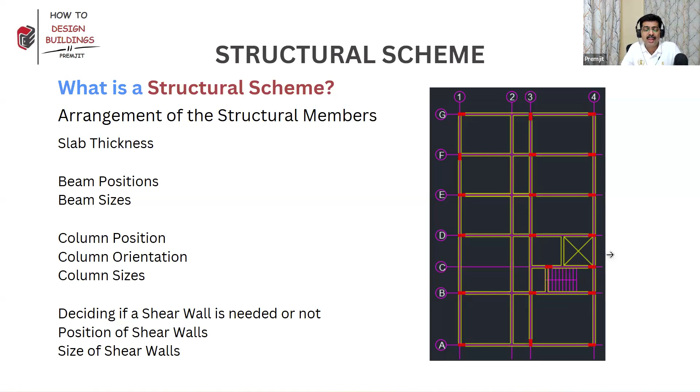Okay, now some of it for smaller buildings comes with experience. You can do trial and error and arrive at that. Some of it needs more detailed study. I'm going to give you certain rules that are going to help you to speed up some of these steps. We cannot completely develop entire skills, but I'm going to give you skill sets or tips that are going to let you explore this on your own, ask questions, and then further take it forward.

Okay, so before getting into scheme, let me also tell you something about IS 1893:2016, which talks about regular and irregular configurations. The below points will reduce damage during earthquakes. The primary aim of a good building scheme is not just gravity loads, it's also about lateral resistance. So buildings with simple and regular geometry are going to perform better. It's not that you cannot have complicated geometry. It's not that you have to deny a client what he wants. But regular, rectangularish geometry will perform better.

Uniformly distributed mass in plan and height. That is, you should distribute your services, your stair, your heavily loaded things equally in the floor. Not like one place you have a lot of concentrated loads, and in another place the loads are very less. Don't do that. In the group, somebody had put a doubt today saying that he's getting tension in one of the columns.

Is it because there is not much load on one side? Yeah, try to distribute it. It's an architectural and client's responsibility, but then you are the person who needs to advise them. Yes, you need to know that. Uniformly distributed stiffness and height, avoid irregularity, and avoid cantilevers.

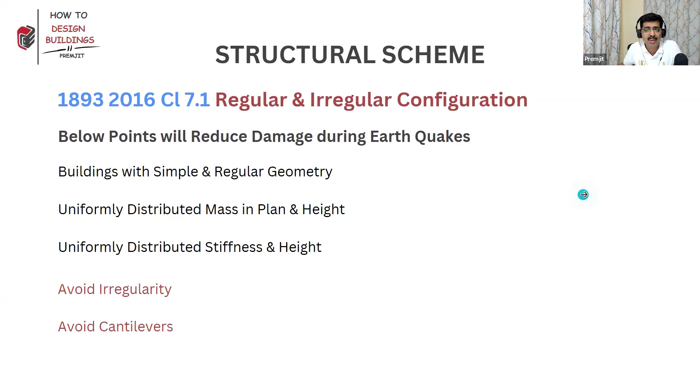So avoid cantilevers unnecessarily. If there is a real requirement, yes, we may have to give it, but otherwise you need to advise and remove them. Okay, so this is one single sheet which will explain it to you. It's a cheat sheet. If you want, you can later ask in the group. I can share this with you. I might have done that in the past.

Point one, avoid irregularity. So what do you mean by that? Geometric irregularity. It should be rectangular, symmetric. All this will help you in having a great performance. I will show you certain things which will allow you to understand this more. Uniform mass, as I told you, it should be distributed. Here some library, here some lightweight things. If you distribute it in that way, you can end up in irregularity.

Uniform stiffness. Say if you put large columns here and small columns in another place, a shear wall in a corner, all this can result in non-uniform stiffness distribution that can create problems. Then your building should have some initial strength, adequate member sizes, some initial stiffness and ductility. Now, who can tell me what is ductility?

Many engineers get confused at that point, especially if you are an MTech holder and somebody asks you in an interview, or if you are a BTech holder aspiring to be a structural consultant and straight away somebody asks you, are elasticity and ductility the same? What's your answer? Yes or no? Tell me. Yes or no? Then differentiate that. What is the difference?

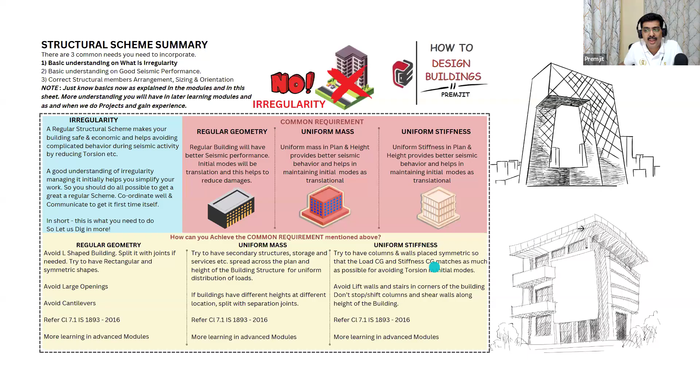Then if you have non-uniform mass in your building, you need to avoid that. So spread the loads across. If you have secondary structures, storage and all that, spread that across. Stiffness, again, as I told you, lifts should not be in a corner. I've already told you that. So these are things that you need to have in order to achieve good performance of a building.

Now, how do you size slabs? If you have done my free course, I have mentioned in that course how to size a slab. That's what I remember. If not, you can ask me. I can share certain things. How to size slabs, beams and columns. You can size it by trial and error if you know how to analyze and use ETABS.

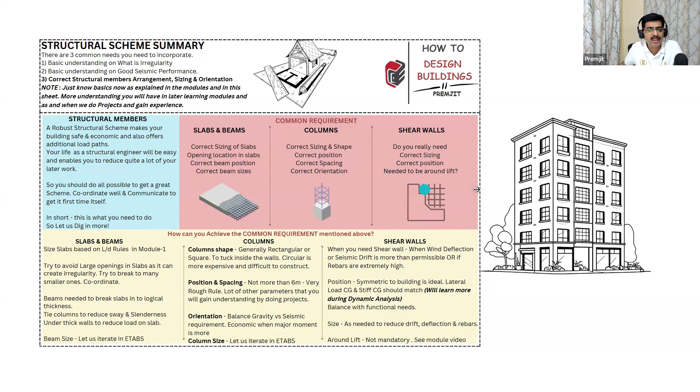That's the better method. Yeah, so you need to know how to size slabs and beams, columns, shear walls. Yeah, this is slightly advanced. Maybe if you're a beginner, it will be a little challenging for you. Other things you can learn faster.

And what is the role of a structural slab in a building? Many of us think that slab is a secondary member, but then it also has a diaphragm action. It's tying the entire building together. Yeah. So it allows the lateral load path in a building. So that's why if you have heard people saying, yeah, avoid large openings in slabs.

What is the problem with large openings in a slab? That will create irregularity. It will create a lot of problems. There will be discontinuity in the load path. Yeah, so if this is your floor plan, your vertical members are tied together by the slab. Yeah, so it acts as a diaphragm.

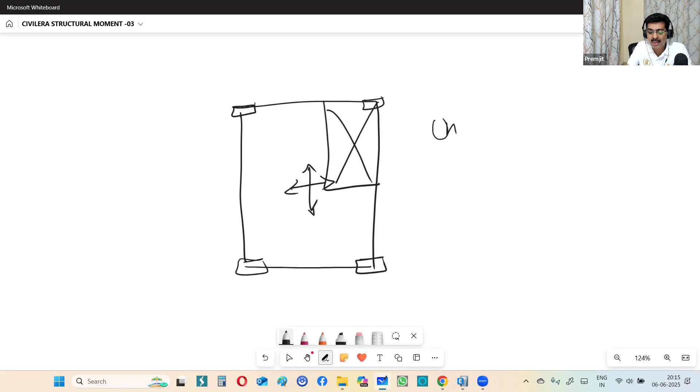It's like a rigid member in the horizontal plane. So it's tying the entire building together. It has a great role in ensuring the building is performing better. Now, if you have a large cutout like this in the corner of a building, that is undesirable. Yeah, that's going to create a lot of problems in your building, irregularity in your building. Okay, so you need to be mindful about that.

So slabs are not just some element, it's having its own significance. So you need to know how to size that. Architects decide the functional space and slab locations, but then we need to educate them to avoid large openings, especially at the edges. So if you are a structural engineer, if you are early in the project, in the design development stage rather, you should be able to propose cutout locations and all that, which are fairly okay.

Okay. And when it comes to role of a beam, or how do you decide beam positions? Basically, there are three rules I can give you for deciding beam locations. Who can tell me how do you decide beam locations? There are three basic purposes for beams. Yeah, one is to split a slab into manageable thickness. Okay, say if you have a very large slab, 4 meter or 5 meter by 7 meter, what is the problem? The slab thickness will be very large.

Okay, so if your slab is very large, its thickness is also going to be large, right? So if the thickness is also large, what happens? The weight of the building will increase. If the weight of the building increases, the seismic forces also will increase. So everything is bad if your slab thickness is very much higher. So first rule, to divide the slab into manageable thickness. Yeah, 120, 100, 150, that kind of thickness we need for the slabs. So in order to achieve that, we give beams. That's one role of your beam.

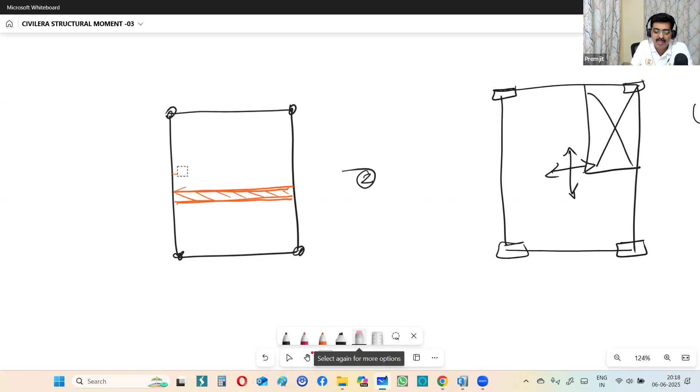But say the wall is slightly away here, then maybe I would like to have my beam under that so that the wall is directly on that beam rather than, I don't want to give the beam over here. Yeah. So slightly I'm moving that beam. So that decision you are taking because of the presence of the wall. So one slab may be slightly larger, the other one may be slightly smaller. Yeah. So that's the second rule.

And the third rule is to tie the columns. Yeah. You need to tie the columns in order to ensure that there is a load path as well as the columns are not very much slender. Of course, the slabs also perform the tie action, but then I would prefer to have a beam tying the columns.

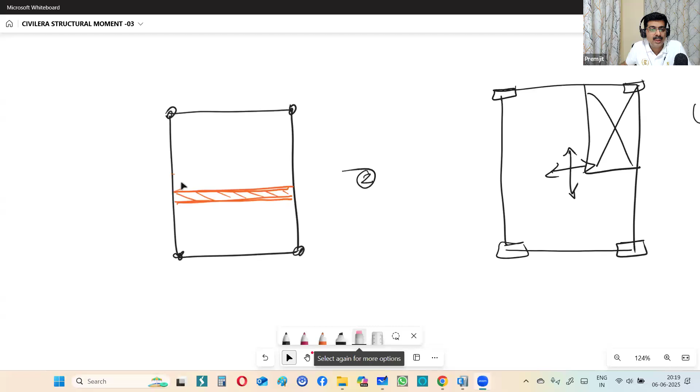So three rules for deciding the location of beams: to divide the slabs into manageable thickness. Second is to support the walls in the building. And third is to tie the columns. So wherever there are columns, you tie them with beams. Yeah, so these are the three primary roles of a beam. So you manage these three.

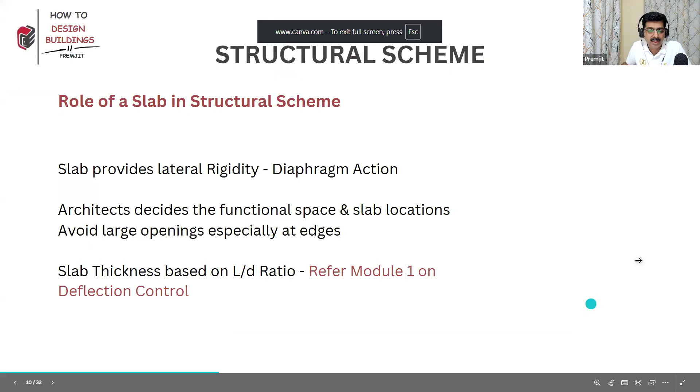See, in a real building, you will have all the three together. So you need to be able to manage that, decide that based on these three requirements. Yeah, so these are tips, but you need to apply it by doing real projects. Okay, so

Column location: there are many parameters, architectural things, structural things. Yeah. A very rough rule: if it's a smaller building, ensure that your beam spans are not very large. So at every 6 meters, if it's an apartment or a small space. If it's more than 6 meters, you may end up with larger beam and column sizes. So ensure, again, it's a rough rule, okay? It's not a mandatory every time rule.

It's a rough rule. Your soil type also decides spacing. If your soil is very poor, you cannot afford to have very large concentrated loads. So maybe if you have a building near a coastal area where N values are very poor, then you may have to have 3 meter spacing for your columns, 2.5 meters sometimes. I mean, it's not all the time, depending upon the kind of the building. Yeah, so soil type also decides your column positions, not just your functional plan.

Your building shape requires careful attention. Yeah, one example. Say if you have a building, you can see my screen, right? Say if you have a building of this shape, something like this or symmetric to it. You may need a column here, a column here, a column here, a column here. Say this is 3 meter, this is 1 meter. You may need a column here.

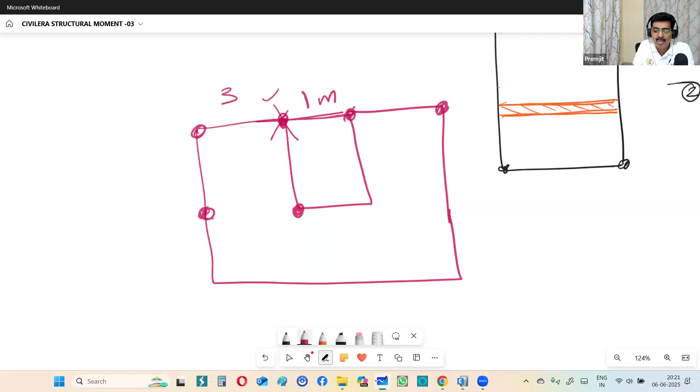Now, if the architect can allow you a beam here, maybe this column you can avoid, or maybe you can keep this and avoid this. It depends. Maybe he can convert this into a pergola. It's an open space. So all this you need to discuss. You have to have some idea about architectural and other requirements so that you can propose this. As a structural engineer, you also need to understand architecture in order to propose certain things. Same way, architects also should have some understanding so that they can decide a few things on structures as well. So that's how it needs to be developed.

And with the coming of AI, you have a clear edge over architects in leading a project, provided you are good at multidisciplinary understanding and leveraging AI. Yeah, so focus on that.

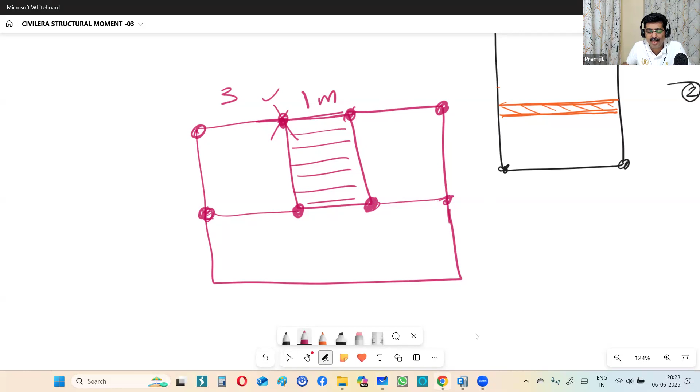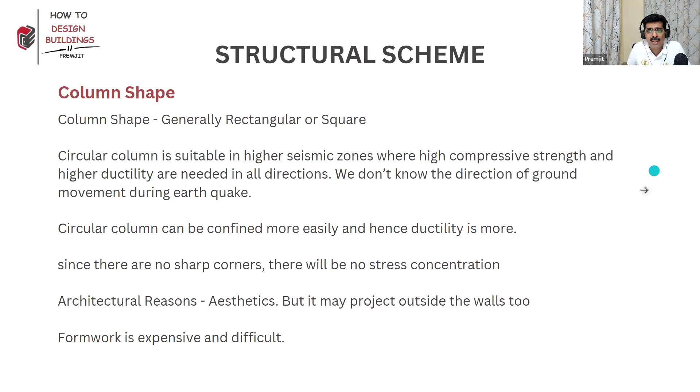But we will respond. Okay, so column location, I gave you certain ideas. Column shape, generally rectangular or square, but there can be situations where you need L columns, sometimes even other shaped columns. I can share these slides for your understanding if you want. You can ask me that also. Column orientation. Let me just quickly have a word on column orientation and then discuss more things. I'm skipping some less significant things that you can understand from the cheat sheets that I'm going to share with you.

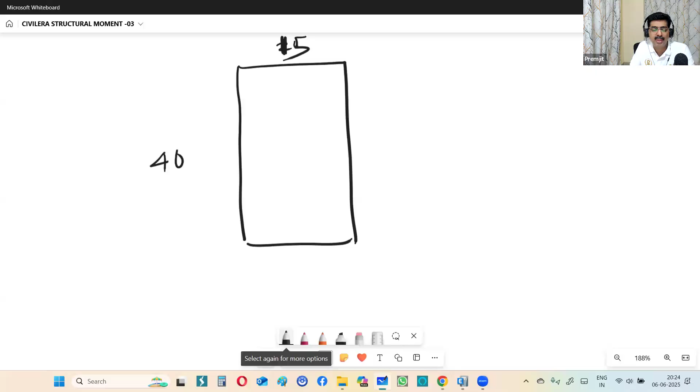Okay, so the column orientation. Assume that you have a building like this. Say this is 40 meters and this is 20 meters, or say 15 meters. Let the number of floors be 5 or 10, whatever it is.

Or let's make this, okay, this is 15 meters. Now, let us do one thing, let's make this like one room for easy explanation. So let this be 7 meters and let this be 3 meters or 4 meters. Now there are two aspects. One is gravity loads. Second is seismic, the lateral loads.

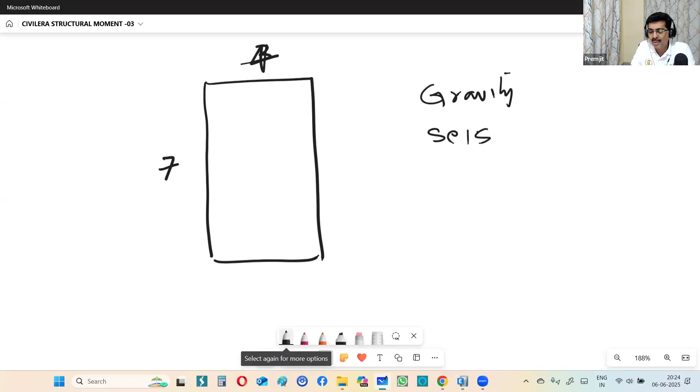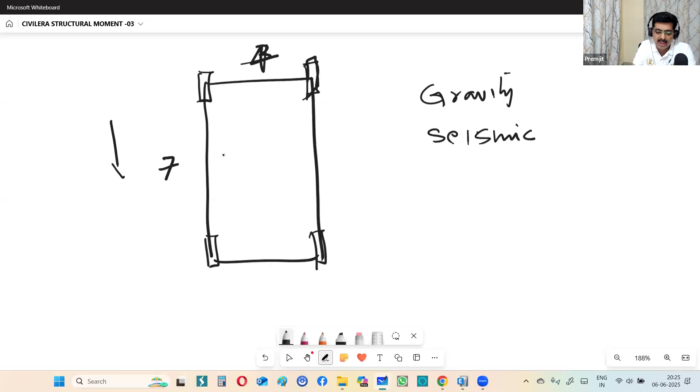Now, if you look at it from the gravity load point of view, this would be the orientation preferred. Okay. What is the reason? Because in this direction, you have larger frames. So now if your columns are oriented like this, it will have better capacity. Why? See, how is the column going to have the bending? It's from the beam. So the beam is having this bending, under gravity I'm talking about.

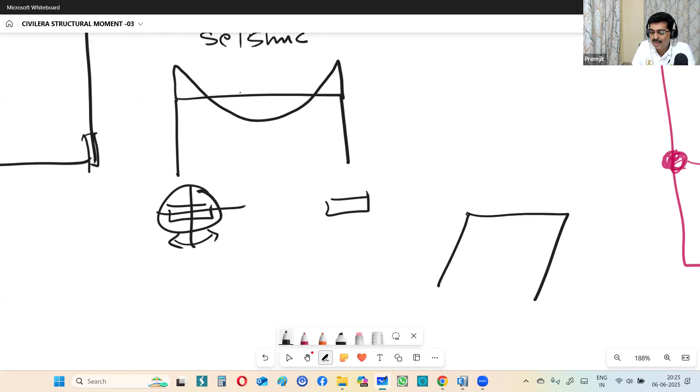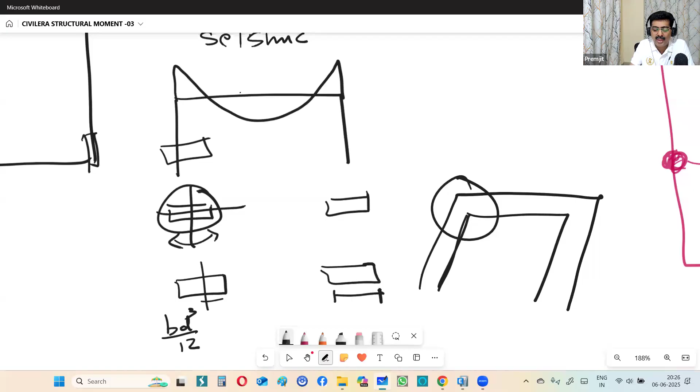When this is having a bending, it's the column which is resisting that. It's a frame, right? It's all framed together. It's not simply supported. They are connected together. They are monolithic and behave together. So there is a frame action. Okay, so the more the inertia for this, the better. What is inertia? BD cube by 12. So more in that direction of bending is better. So here the spans are more, so it's oriented like this.

But then please know that when the building is narrow, from a seismic point of view, this will have more criticality in this direction probably. Why? Think about a table you are pushing and trying to overturn. When the width is less in that direction, it will fall faster. In the longer direction, it will not fall because it has more stability in that direction. So from a seismic point of view, maybe you will need it in this manner. So how do you go about that?

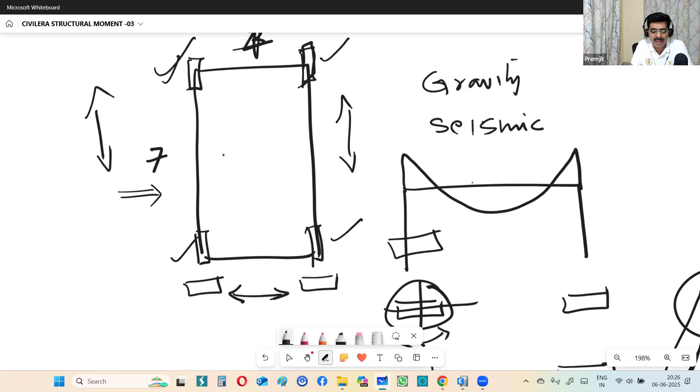So if you're confused, what you could do is for your initial position and orientation, go with your gravity rules. Later on, do your analysis, understand the deflections, lateral deflections, and decide based on your analysis results. You can decide if you want to reorient it. Certain things, with experience, you will be able to judge very fast and easily. But certain things you will have to do your analysis and then arrive at your final orientation.

When you have multiple frames and multiple floors, it might be a little challenging for beginners, but this is a rough rule. Do more of it. Start doing it.

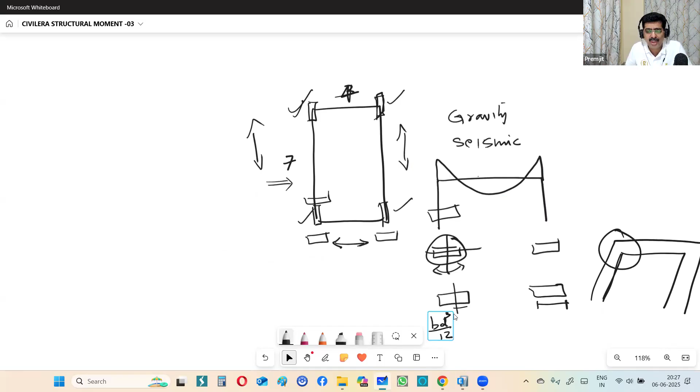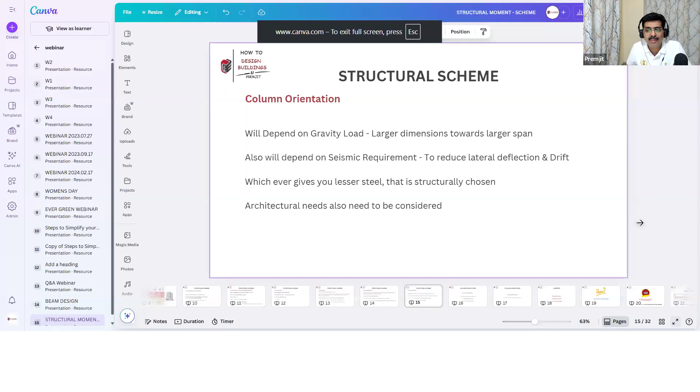So this is one little rule for deciding the column orientation. There are more things in that, but I'm giving you an idea of what you need to be doing based on gravity load and seismic load. You need to decide your column orientation. Now tell me, what are the benefits of doing this? Benefits of doing a proper, very good scheme.

You might have had challenges from clients and architects. I want to remove these columns. Fewer columns are better. How many of you have heard this? Fewer columns are better, it is more economic. How many of you have heard this? And how many of you believe this? Say yes if you have heard this from an architect or a client or somebody, that fewer columns are more economic.

Yeah, so there are a few yes. Akshada says yes. Parikshit says, but it's not safe. Yeah. So less is not great. More is also not great. The optimum, that's where you need to be able to get to. You should be that engineer who gives optimum design, not more, not less. That's where you have to be. There is an optimum for everything. Less is not great.

Because if you have fewer columns, maybe your footings are going to be larger in size. Maybe your building is going to have fewer alternate load paths. So there are going to be a lot of challenges if the numbers are less. It's not that it's going to be more economic. It's going to be a compromised building if it is economic.

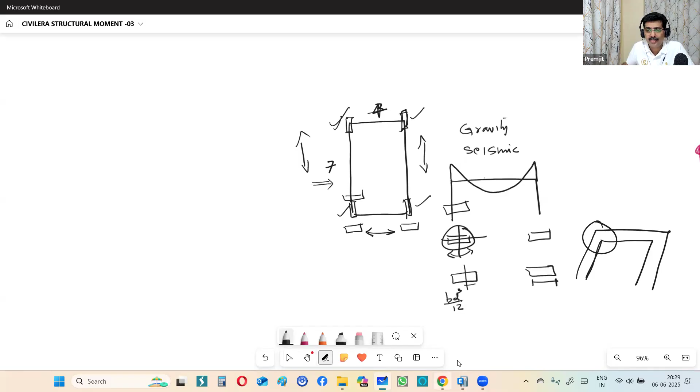Okay, so what are the advantages of having a great scheme? That's what we are going to very quickly explain. And if you are able to convey this to your clients in the right way, even architects, they are going to accept that. Many times it's the way that you convey: you are rigid and you are trying to demand things. You need to be able to influence them, those who are wanting that.

Okay, one is better performance. What do you mean by better performance? I will show you some better performance in some time. But we discussed about, what do you call, irregularity. Avoiding irregularity will allow better performance of your building in the event of earthquake. The second thing is alternate load path. I will come to that. And third is easy to manage design.

In the later life of your design, say you started your scheming and try to get the perfect scheme, then later on you will not struggle. You means the entire design team, you and the architects and everybody together. You will not have to struggle to make things work by doing, redoing, testing, looking at the stiffness distribution, changing that, playing around with the structure and changing the stiffness center and so on. So you will not have to do a lot of work in order to manage. You will save time, you will coordinate better, you will get a more performing building.

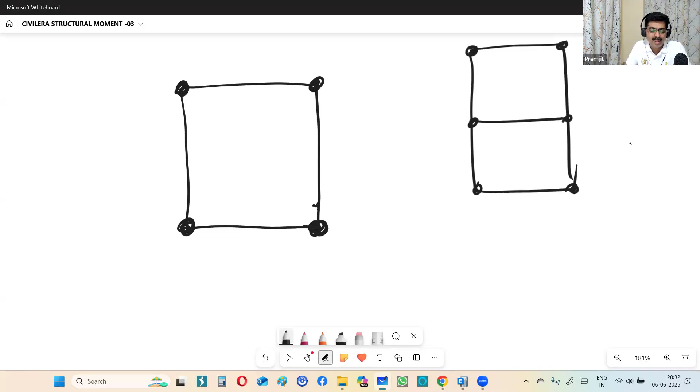Now assume you have a building or say a small room. This also increases your confidence if you do proper engineering. And it's very important for you to understand this so that you can influence others also. Say the architect and client said I want only 4 columns, it's a small room. Say this is 7 meters. Due to whatever reasons, if one column fails, let it be a blast, accident, design mistake, construction mistake, whatever, one column is gone.

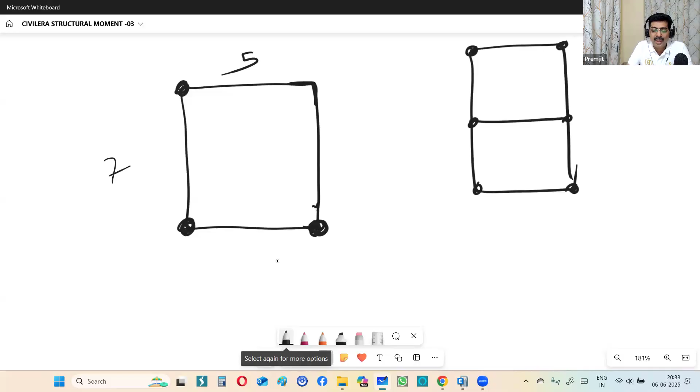Now, what is the possibility that the structure will not fall immediately? Very less possibility. Why? Say this is 5 meters. If this has to stand, this one column needs to stand like a cantilever, taking this point load also. How many meters? 5 meters. Very rare chance. But had you got one column here breaking the 7 meters, even if one of the columns goes, you need to cantilever only 3 meters, 3.5 meters. And it's also having a back anchorage. That is likely to stand.

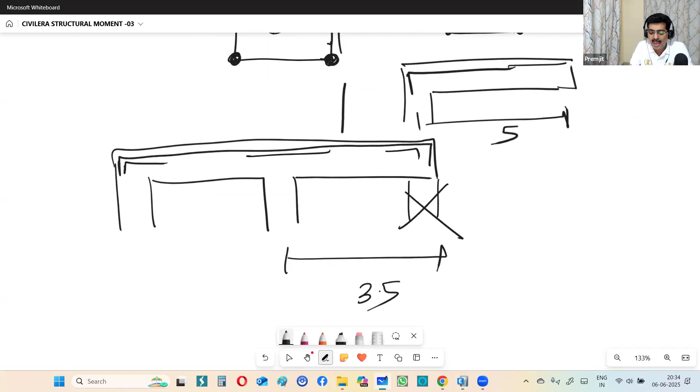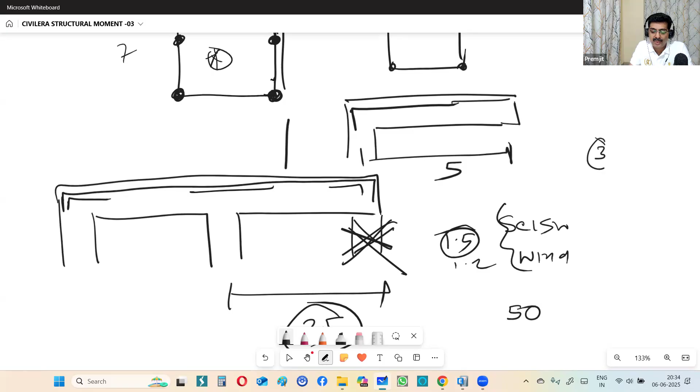Why? Because you would have designed this for seismic and everything. So your detailing would have been something like this. You have extra bars here, you have extra bars here. This column went off, now it's cantilevering 3.5 meters. 3.5 looks very large. But the fact is, you have done this for seismic, you have done this for wind, and moreover you will have 1.5 or 1.2, whatever your factor of safety. Even under gravity, you have a 1.5 factor of safety, which means it can take 50% more load. And your design live loads are generally very high; you will not have that kind of live load. So when this column fails, you only have the actual unfactored gravity load.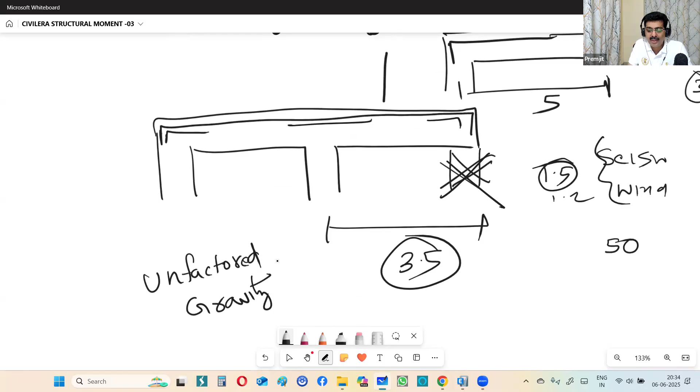There is no seismic. Say an accident happened. So at that point, there is no seismic, right? It's just an accident. Column failed, maybe a blast, or maybe a construction mistake. It is cracking. Okay. Now you have already designed for seismic, but seismic is not acting, so you can use that rebar available there. And your factor of safety is not needed now because you are not having that overload.

Dead load also is not overloaded. It's the right amount of load here. Maybe live load will be less because people are going to be evacuated. So this steel provided here will bridge that failure. It's having an alternate load path. The actual load path would have been load going half here, but right now this is gone. Now the load path changed to this cantilever.

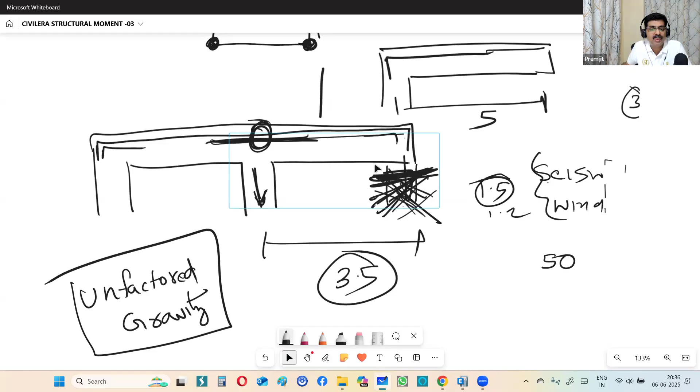More loads are going here, but all these are designed for factor of safety as well as seismic and other combinations. So it has that capacity to act as a cantilever. So if you have checked this prior to your execution and provided the scheme in a way that you bridge all this, then your building will never have disastrous collapses.

Now you should not ask me, what if this column and this column fail at the same time? That's a very rare chance, right? The probability is very less. If that happens, your building might fall down. We cannot take care of every column failing at the same time. We are not magicians. But one member failing at a time, you should be able to take care of that. Same way beams.

Assume this is a 7 meter by 5 meter slab. Now, if you don't give any secondary members, what happens? If something happens to any one of the beams, the chance of the slab remaining there may be lesser. But if you have one here, maybe this was designed as a two-way slab. If this beam fails, it can still span as a one-way slab, applying the same principles. Because live load is less and factor of safety is there, it might be able to span as a one-way slab, provided your detailing is proper.

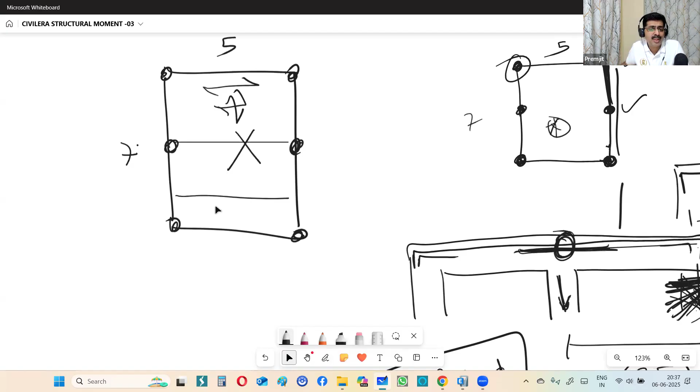So this is one of the many reasons that a non-engineered building is sometimes not failing, it's standing, because without the Maestri's knowledge, a lot of alternate load paths are automatically coming in. Without your knowledge, a lot of load paths already exist. So now think about you applying that mind and scheming. What will be the result? Your building will perform wonderfully. So apply your mind.

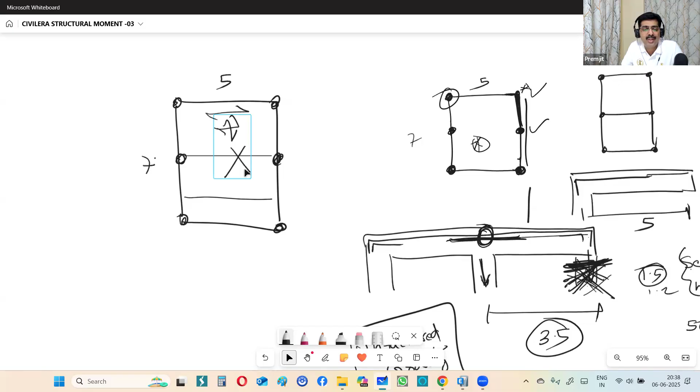Even if you are an experienced structural engineer, from tomorrow, start doing this. Say you produce your drawing. Your final layout is ready, and you are going to issue this to site. Spend half an hour. Identify some key members in your building, as in, if that member fails, can more than 25% of the building fail?

Just take a look. See if this beam fails, or start from columns. If this column fails, will more than 25% of the building fail? Then it's a disaster. Attend to that by providing additional columns. Same way, if one beam is removed, say this beam fails, can this slab now act as a one-way slab? Or can it act as a two-way slab like this just by the removal of one beam?

Might be possible because, say, this is 2 meter, 2 meter. Without this beam, that becomes 4 meter. This is 3 meter. Maybe you still have only 8 at 200 requirement. So removing this beam, that slab might still be standing for unfactored moment. So identify some key members, remove one at a time, and check for the possibility of that building standing. 75% should stand at least. Otherwise it is going to be a disproportionate collapse, or a large area will collapse.

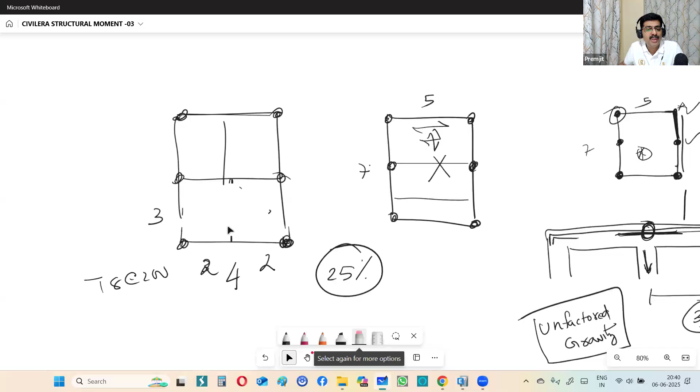And if you are able to convince your client saying that this is why I'm doing it, this is the reason for that. If you do it without much additional cost, minor additional costs, maybe you will be able to meet that. So here, the only change that you might have to do is, when you had this beam, maybe you had detailed your slab like one bar going here as cut bars.

Okay, now when that slab has to stand without this beam here, maybe you will have to give that bar continuous, like this. So that's a minor cost increase. Okay, so if you take care like this, your building will have a lot of bridgeability. You will not end up.

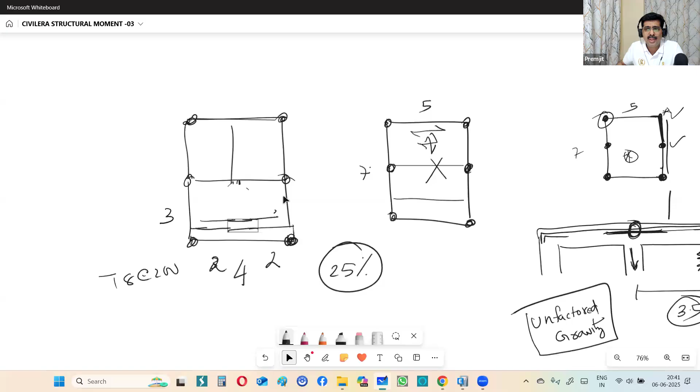So depending upon the importance of your building, you need to decide how many checks you need to do. If it's a small building where you don't expect any kind of accident, leave that. Okay, so that's one tip, or that advantage that you're going to get with a great scheme. All right. Now coming back to the presentation.

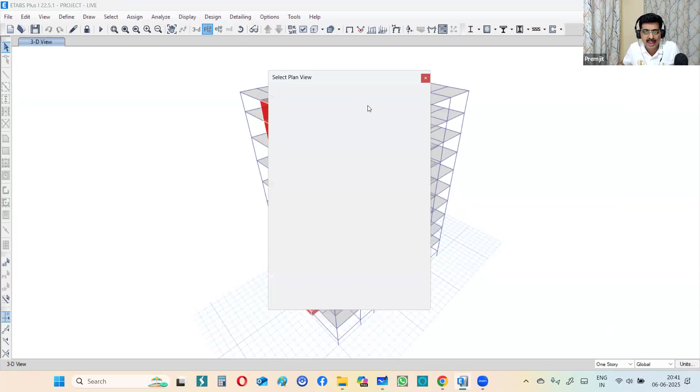Okay, so let me also show you one more thing, better performance. Again, I might have shown this in the previous webinar also, but let me show you for the newcomers here. Say this is one of the projects that I do for the current batch of DCTS students. Let me take the plan. Let me show you a few things. Give me a second.

This is the ETABS model of that, analytical model of that. This is the scheme. I'm not saying this is a perfect scheme. There are shortcomings in this. Can anybody tell me what is the shortcoming? What can be the shortcoming in this? Type and give me the answer based on whatever I told you so far. What can be a shortcoming in this particular scheme? Just don't say shear wall.

What shear wall? And I think Michael is also my student. Beam not connected to column. Beams are connected to column, Pavan. Lift at end. Vivekanand says lift at end. So what happens if the lift is at end? Location of shear wall. Parth is saying location of shear wall. Anyone else? Shear wall will cause irregularity. Opening.

Ravi, who said, oh, Somil is saying large opening. No, this is not a large opening. This is a normal opening. This is a stair. Shear wall should be at center. Yeah. You can compensate that. Even if you have a shear wall here, you can manage that with other additional walls, but then that becomes a little challenging for this kind of building.

Okay. So let me show you that. I have analyzed this. I've done a dynamic analysis for this. Already done. I'm not showing you how to do the dynamic analysis. Now I'm going to show you the mode shapes. So I'm going to animate this. Give me and apply. So it's going to show the mode shape here.

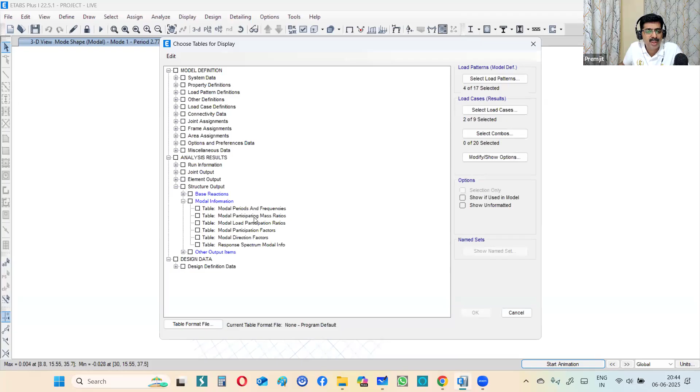But then you can make out from your model mass ratios. If you go to the table, what I showed you was the graphical representation. Now here, you will be able to find out the mass participation by seeing this. You can see here that y direction it has 52% and torsion is 28. So 52, predominantly it is y direction translation, but you also have torsion.

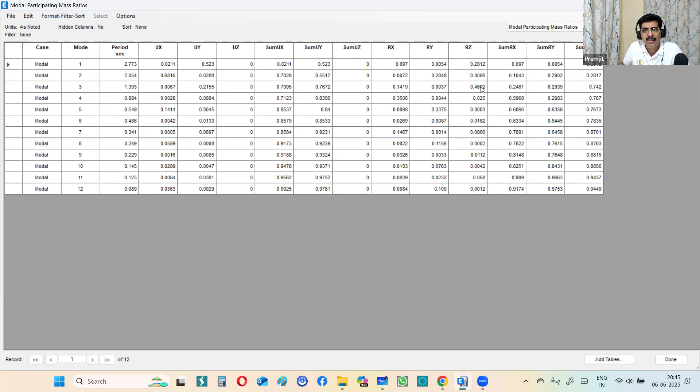Now, if you look at the third mode, you have 21 y and quite a lot of torsion. See, 46 is torsion. So let me show you that also graphically. Let me go to the second mode first and then animate.

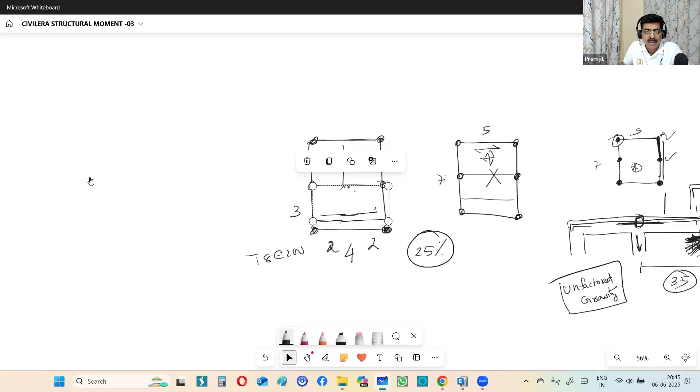So that's a pure X direction translation. Now, why are these important for those who are new? See, an earthquake is for a little time. So how the building is going to move in the initial modes is very important, because if your building is moving in a translation direction, in X and Y direction, it is good, because if it goes into torsional modes in the initial stages, your building is going to experience a lot of brittle forces.

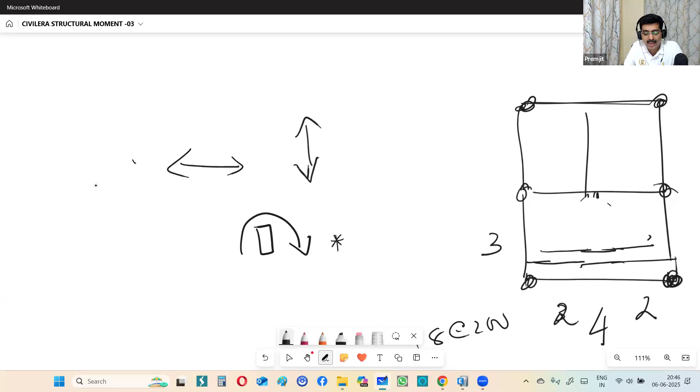Torsion will induce a lot of tension in your building and it can fail very quickly. Rapid failure will happen, disproportionate collapse can happen, and people will not get time to evacuate. So if you avoid initial modes coming in torsion, it's good for the building. So your scheme should be in a way that when the earthquake starts initially, your building should not experience torsion. That's what we are ensuring by doing a good scheme and saying that torsion should be avoided.

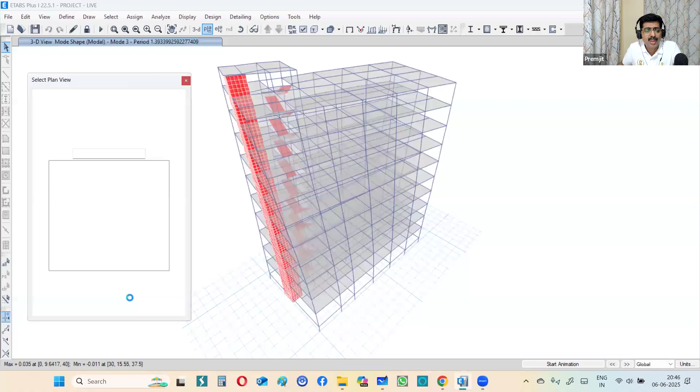Okay, now if you look at the third mode, that's a pure torsion. A lot of torsion. So you need to try to avoid this. And for avoiding that, you may have to redo certain scheming things. You may have to move this to another location or balance it with additional stiffness in the other end, all that stuff. There are many more things to be experimented and done in order to get rid of torsion.

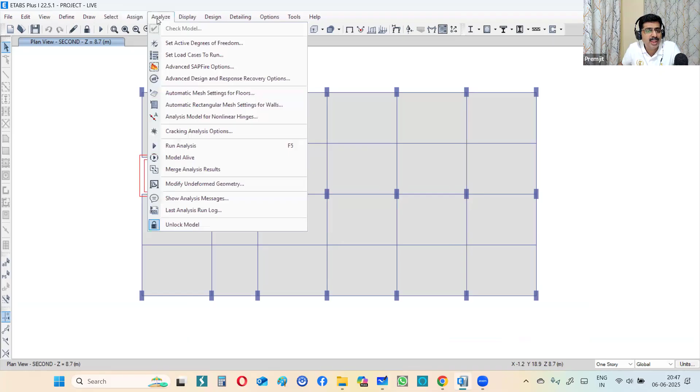And if you want to know this more clearly, I can share one more tip. See, when you come to analyze and look at the set load cases to run, here there is a button, calculate diaphragm centers of rigidity. This is for those who have some experience; beginners will not be using this straight away. If you click this button and then analyze it, I've already done that, then go to display and show tables,

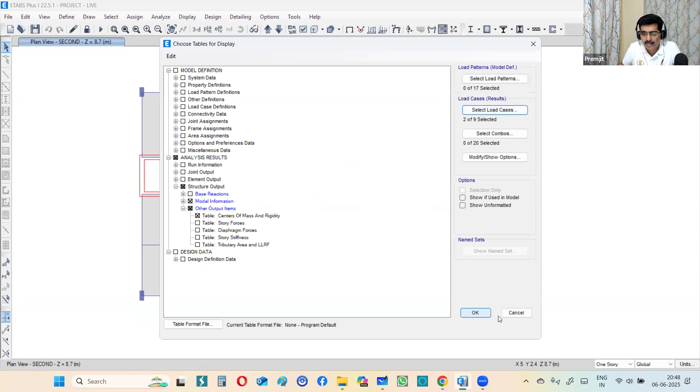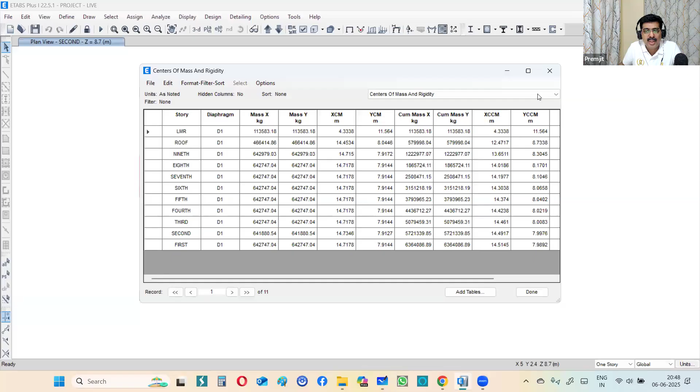come to structure output, and then come to other output items. Here there is something called centers of mass and rigidity. Click on that and click on OK. You can see here, it's displaying the center of mass, and it is also displaying the center of stiffness. So you can see how far it is and make the corrective action if needed.

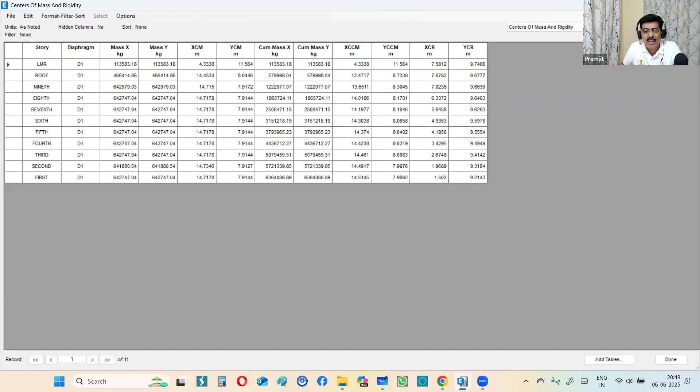So there is a lot of difference between center of mass and the rigidity, whereas in y direction it's less. So in the x direction, your mass center and your stiffness center are not near. That's the reason there is torsion in the initial modes, whereas in the other direction it's closer. All this you can check by enabling that particular option.

So how many of you knew about this, seniors, those who are saying you are consultants? Did you know about that option? Yes if you knew it, no if you didn't. Type in. Just want to understand your experience level, so I can take up topics in the next webinars. Vivekanand, Parth, knew about that or not? Nobody? Say yes or no. No, says Akshada. Yognath says yes. Great. Satyajit says no. Okay, there's a mix of everything. Anyway, that's how you look at that.

Now, coming back to our planned things. Let me have an eye on the time. Okay. So that's all I plan to talk. I will give you more chance to discuss and also take up some of the questions that you had asked in the groups and in the learning community, if you were my student.

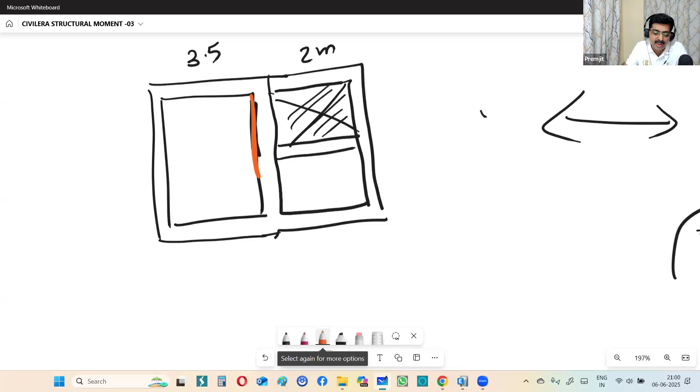Now if all the slabs are modeled as shell thin, then maybe yes, this one matters slightly, but if it's a small cutout like this, which generally occurs in a building, it is insignificant. Rather than that, when you design this particular slab, when you are designing the span steel and look at the coefficients, treat this edge as discontinuous, because your idea is to be conservative. So you should get more steel here in your design.

How will you achieve that? By considering this to be discontinuous. While designing the top steel here, it is continuous anyway, so while deciding the top steel here, you need to consider this to be continuous. This is how you do it in a normal case. So don't think too much. Don't try to be a perfectionist. It's not really needed for a medium project.

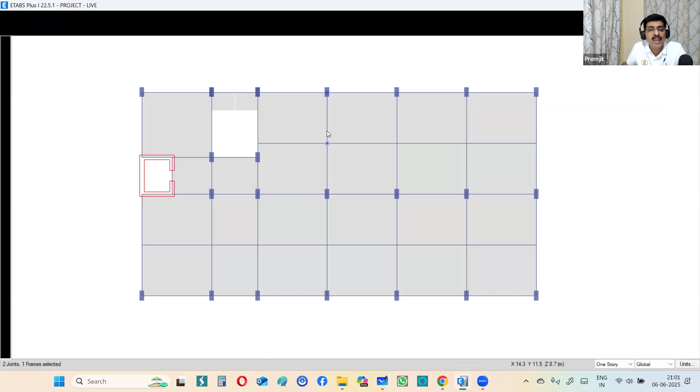But having said that, if you want to do it, if it's a cutout, you can of course delete that. And even if it's for checking the slab design, say you are following the shell forces and you are trying to get the forces from ETABS for gravity loads, you can delete one slab and check out the discontinuity. Or if you anyway want to do it, then you can go here and there is an option only if this is shell. Okay, all these are shells.

You can assign shell edge releases. So you can decide which of the sides you need to release, and you can release the edges. Edge 1, edge 2, all that you need to look at the way you have modeled and understand which is edge 1 or edge 2 by looking at the naming and the way you modeled. Whether you started here or started here, that decides edge 1, edge 2, and all that stuff.

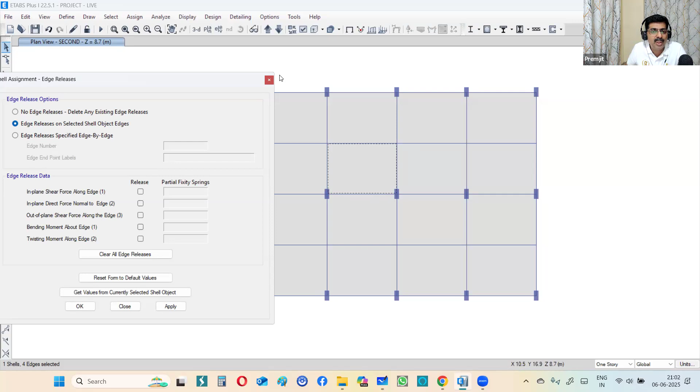Use that, try around, you can ask in the community again. So I've given you a tip. You can release that using that option. But it's not really important for a small structure, unless you are doing a very large slab with a very large sunken and you have modeled everything as shell thin and it's bothering you. Otherwise, leave that alone.

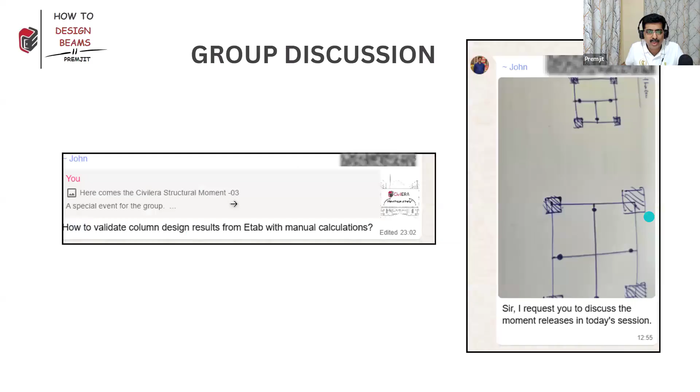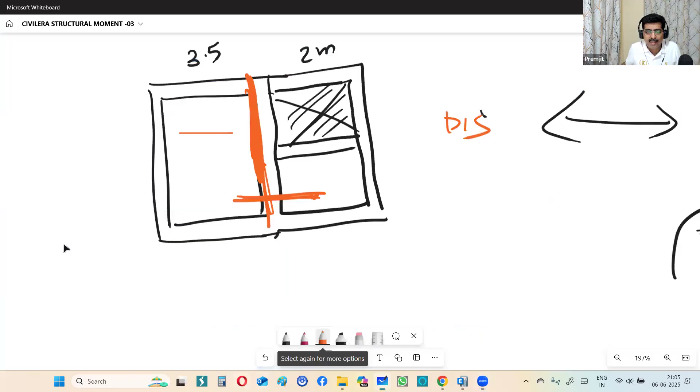AST values in ETABS for beams do not follow any pattern like descending from bottom to top, which normally should be. So should we not do? I'm not understanding this question, Ayush. So you need to tell me. Are you here now, Ayush? I had asked you to come in the live class. Ayush, are you here? I think he is not there. So let me just answer it, if my understanding is correct.

Say you have a structure like this. If you are not doing it for seismic, only dead load and live load, you all know the lower level column will have more load, and it keeps decreasing as you go up, so you will mostly have more steel lower. But moments and forces interact, so there will be changes. Still, it's likely your lower level has more steel requirement. But when there is lateral load, it can vary based on the frame action. You may get more steel here, less steel here, again more.

All that can happen. Now coming to the beams, generally your lower level beams are likely to have more forces, and as you go up it might be reducing. I don't know what exactly you are asking. So you cannot give all the floors the same steel in beams. If it's a very tall building, it will change, especially in the last level or pre-last level and all that.

Your beam steels are going to be much lesser. Yeah, so you will have to detail it out for all the levels, or at least group 2 levels each. You need to look at the pattern, look at your particular scheme, and then decide if you can group multiple floors together. But definitely all the floors you cannot give the same steel. You will be very much uneconomic if you are going with the conservative approach, or else you will be unsafe if you are going with the other way.

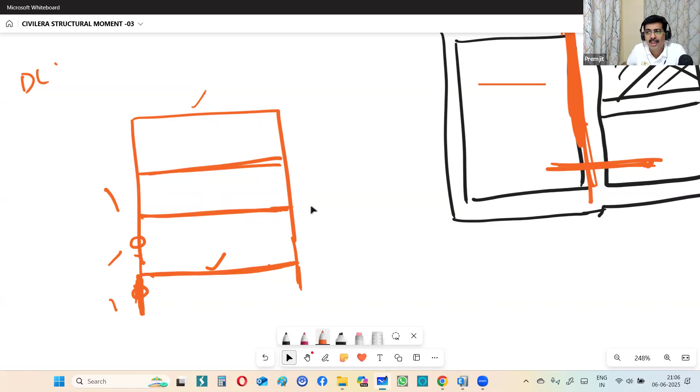So I didn't exactly understand your question. If you clarify it, I would be happy to answer. Now you can post it again with more clarity in the community.

He is asking about shear wall boundary element. Is it needed or not? Yes, it is needed. Nowadays, most of the firms are just providing uniform reinforcement. It depends again on the size of your project and all that. It is better to provide boundary elements, because if you look at the shear wall, that's how it is going to behave. It will have corner stresses.

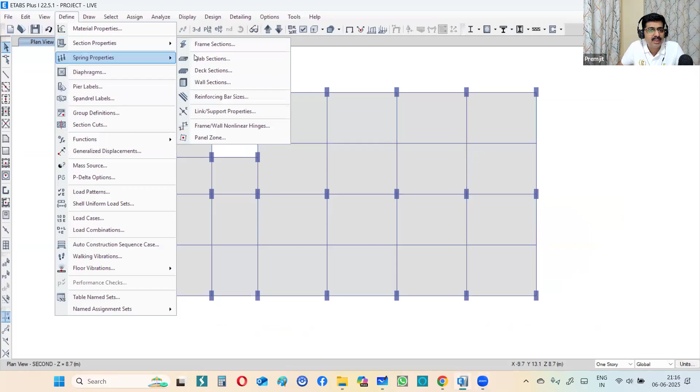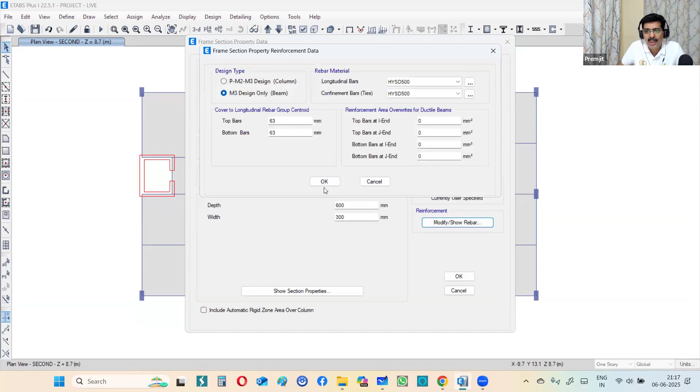Say those columns, you can pick and see whichever is having more; for those columns, instead of performing the design option, this is beams, in columns also you can do the same. Instead of using the design option, reinforcement to be designed, you can go with the checking option. Let me take.

It's taking a little time. Yeah, instead of this, you can do this and keep your required percentage here, and whatever is failing, you will be able to see that. So whatever is failing needs more than that. Whatever is passing is having lesser than that. So you group those columns and manage it. That is the best way I can right now think of.

Okay, thank you. Yeah. Any other question? Anybody? No? Sir, Narayan is. Yeah. Tell me.

Sir, how to check my ETABS model is correct or wrong? See, this is a very broad question. How will I tell you if ETABS model is correct or not? There are so many checks required. So in the course I have explained, you need to keep three kinds of checks in any project. It's not just for ETABS model alone. For anything, you need to have three kinds of check in your process. What is that? One is software based.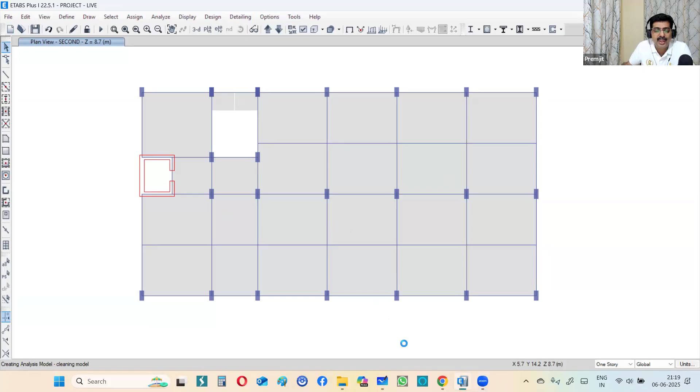So what is software based check? You have this analyze, check model. Give the tolerance, select all this, click on OK. So this will do certain kinds of check, correct? That is one check, software check. So if there is error, it will show there is error. If there is no error, it will say there is no error. So this is one kind of check that you need to adopt. That's a software check.

Then you also need to inspect. See, I showed you that deflection. Analysis will take some time. Let me analyze it. I will show you. Let that analysis occur there. Till then, we'll speak something else.

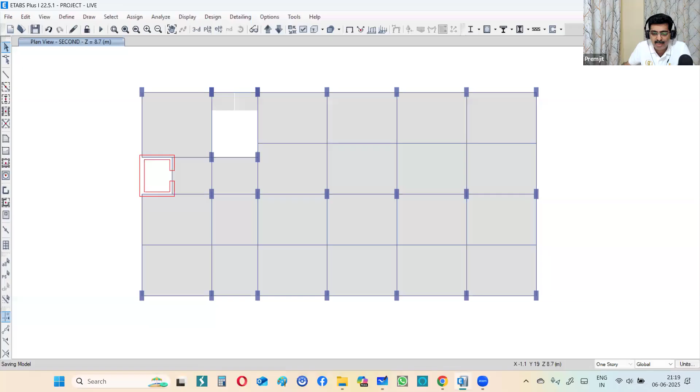Second check is behavior based, as in, are you getting the expected behavior? Cantilevers behaving as cantilever, simply supported beams behaving as simply supported beams, continuous beams behaving as continuous beam, bending moment pattern, deflection pattern. All this you need to go and check and ensure it is behaving fairly. Thirdly, you need to have a process check. Okay, what do you mean by that?

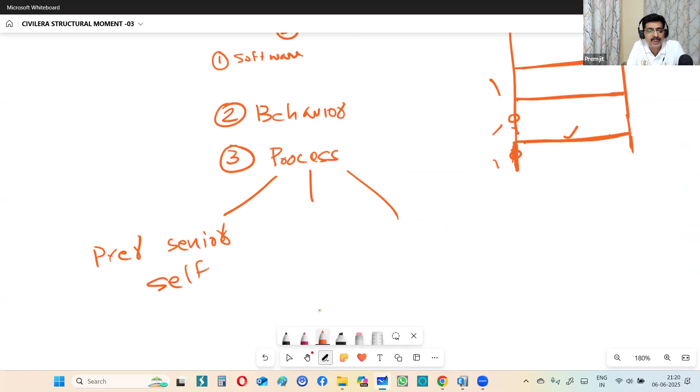Your model checked by your senior. Your model may be checked by a peer. Your model, you self-checking it for every aspect of it. So in all these processes, you develop a checklist for you. Definition, load calculation, whatever. Wherever you are making more mistakes, that should have more priority in your checklist. So develop that. Ensure that once you have done that, you check this, because this is something which you are always making a mistake.

Somebody might forget to assign a support. Check that. Every process you include as a checklist, ensure that after you do it, everything is checked. That's a process checklist. Then your team member checking it. If your company has multiple teams, maybe another team checking that. Your senior checking and validating. All this should be implemented as a process.

So don't expect everything to be manually checked and verified. You will die doing one project. Everything cannot be manual. See, do you think that a 20-floor building, not even a 20-floor building, in the current situation, depending upon the project situation, the demand, do you think that every project can be manually designed and analyzed? Is it even possible? How many load combinations you have for designing a column?

So you can only do certain checks. Maybe ensure that there is no gross error. So you need to rely on all these. It's not just everything manually checking. It's impossible. So you need to wisely use these software checks, behavior checks, and you need to have process included. That's why very large projects are proof checked by other consultants. It is made mandatory in India now. The BIS itself tells you that it should be peer reviewed.

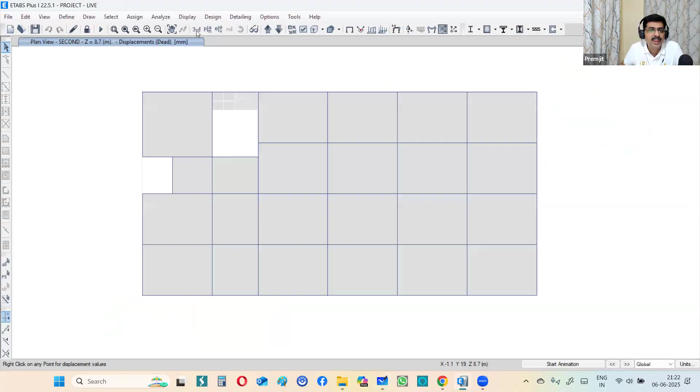Now let me also tell you, in order to ensure you have fewer checks, maybe you can go and do this. One second, let it animate. So if you have any disjointed members, you will be able to see some things fluttering.

So if something is not connected and all that, maybe it will flutter and the deflections will be very large. So seeing this behavior, you should be able to find out if your model is okay or not. A lot of things you can capture by adopting these practices, so you need to employ all this. Agree? Thank you, sir.

Parth is asking how is cracked section considered even after. See, factor of safety is something else, cracked section is something else. They are for two different things. Any other questions?

Okay, so we are almost hitting the last minute. Hello, sir.

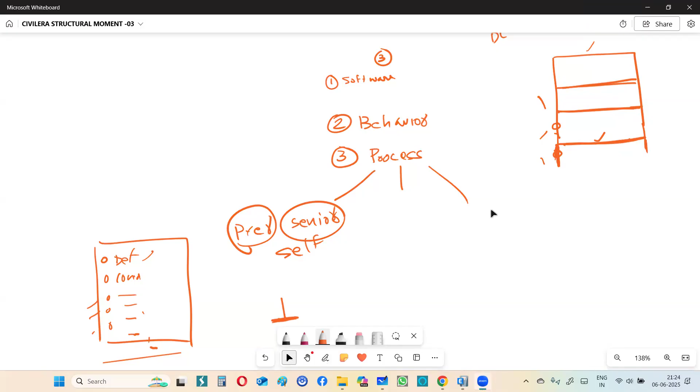If the plinth beam depth is increased, will it take the uneven settlement in soil, sir? No, see, beam depth is related to what? Is it a ground bearing beam? Is it a frame beam? You have to tell me all that. If it is connected to the columns, then you are required to give the required depth, not more, not less.

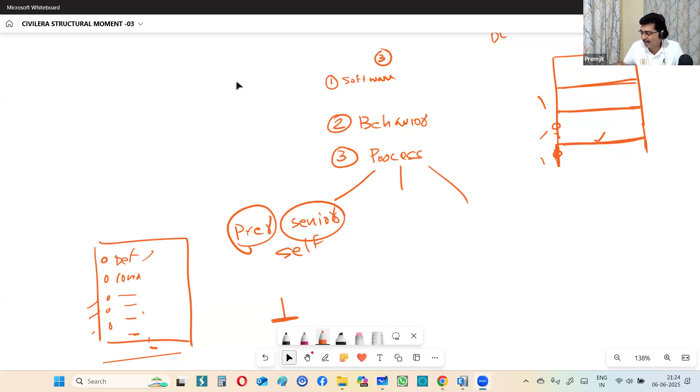So if you have a beam, then your load is not going on to the lower level. It's only when you are deflecting. See, if this is your plinth beam, and say here you have soil, only if the beam settles more than permissible, it's going to transfer anything here and settle. Or if it is ground bearing, then only it is going to settle. No, actually, the column is going to settle. Will the beam take care of the column settlement?

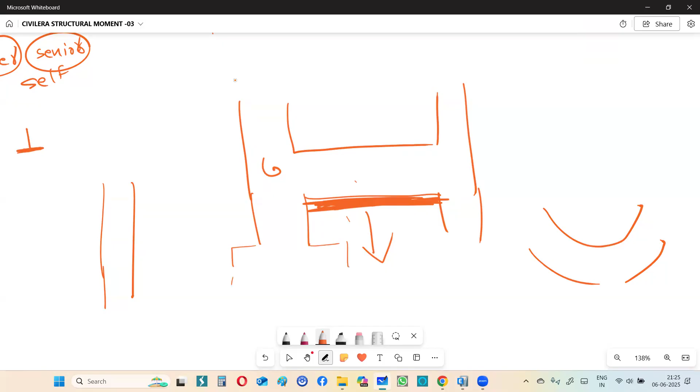So if you are talking about the foundation settlement, connecting the columns is going to reduce the differential settlement because they are rigidly connected. So it will act as a single unit, and the chances of differential settlement are less. More depth to the beam will make it more rigid, and there are more chances of it acting as a single rigid body. So the settlement can reduce if the beams are deeper.

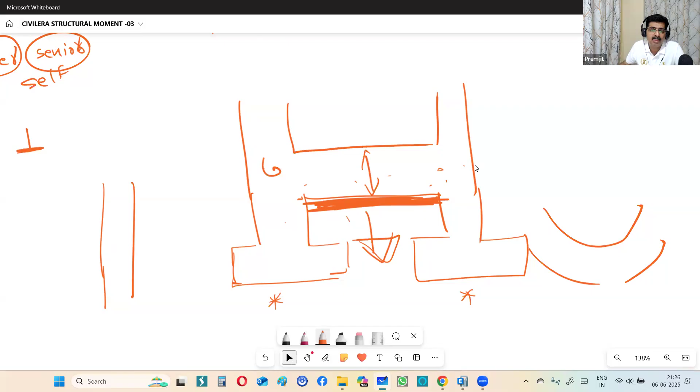But all these are precautions. You should not rely on that and reduce your footing size. You need to design it for the SBC that you know, and do the number of boreholes as per the requirement. After all this, you are connecting it with plinth beam for extra avoiding of settlement. If you take care of all this, there will be no problem.

Sir, what is the single curvature and double curvature in column? That is based on the frame behavior. If it is in single curvature, you will be able to pick it from the way it is bending. Double curvature means it is having a double curvature. So you are talking about the way you are adding the additional moments, right? As per IS 456, the slenderness moments. Yes, sir.

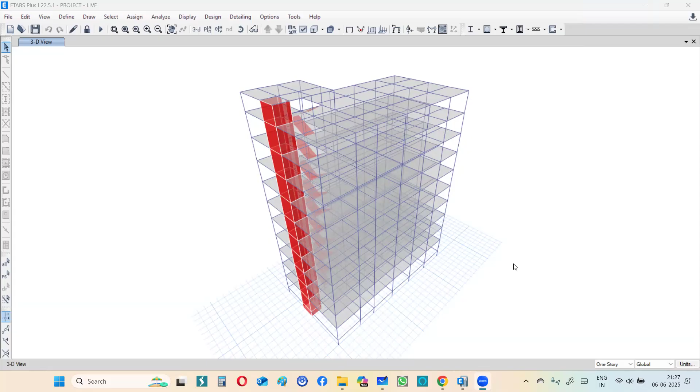You can leave that if you are designing using ETABS. Instead of the addition and the two methods given in IS 456, ETABS will design for multiple sections, so it is automatically covered. That equation in IS 456 is given to ensure you are doing it conservatively. But in ETABS, one member is designed at 3 different sections, and you can increase the numbers by changing the setting. Since it is designing at various locations, you don't have to add that equation. ETABS is internally taking care of that. It's a thumb rule, in fact, to capture the maximum.

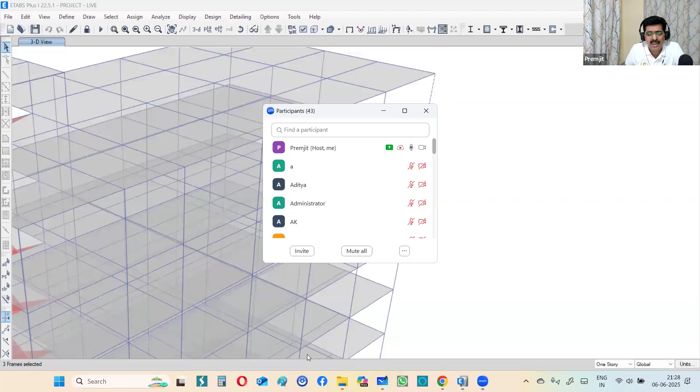Who asked this? Yoganand, is it? Yes, sir. You had taken my program? Not fully covered, sir. I'm going through it. Okay, in that it's there. Okay, sir.